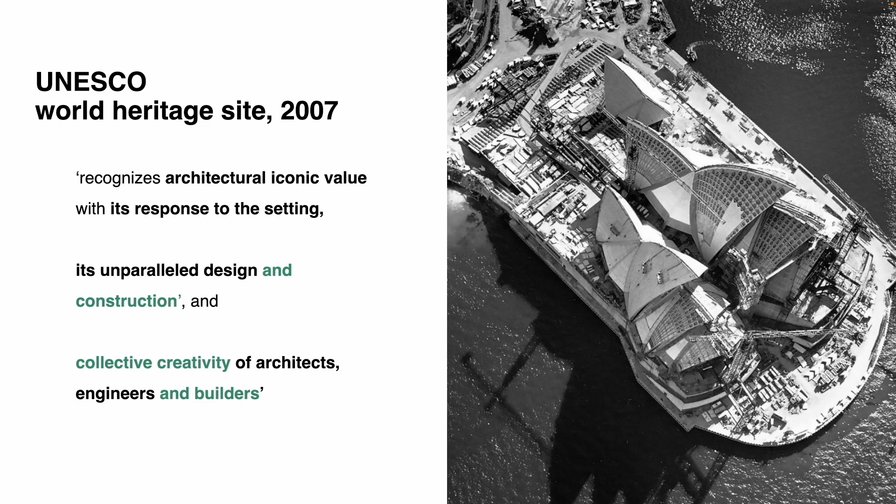In fact, the role of the contractor was also central to the Sydney Opera House inscription as a UNESCO World Heritage Site. And in fact, the listing goes even beyond acknowledging the building's architectural iconography and includes its unparalleled construction and collective creativity of architects, engineers, and last but not least also the builders.

However, for the past 50 years, attention has been mostly centered on 2 key figures, of course, Jørn Utzon, the architect, and Arup, the firm, or Ove Arup, the founder of the firm. The story of the building has also often been framed, as we all know, through the conflict between Utzon and the Australian government, and Utzon's final departure from the project. And also eventually, his replacement with Peter Hall and so on. And this is the story.

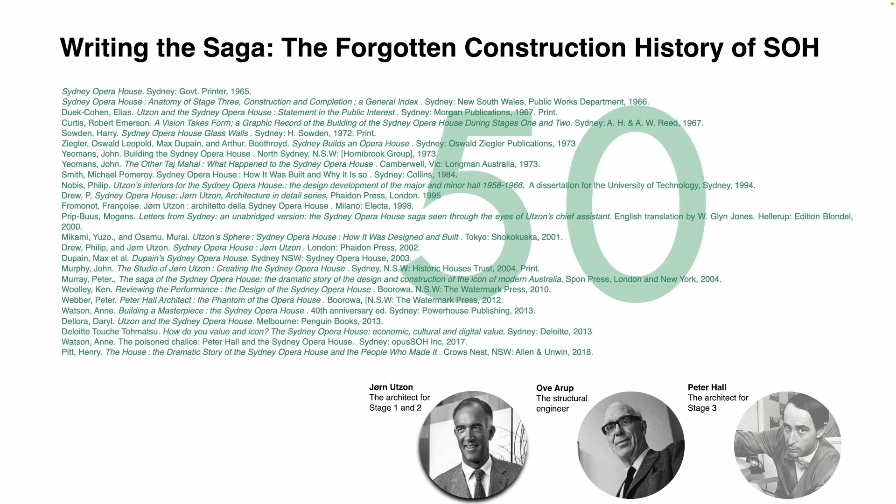These are all the books and papers published on the Sydney Opera House in 50 years. But there was very little recording the construction history of the Sydney Opera House. So now, coming to the project itself, what we all know very well is that it took 5 years of intense hard work for the engineers at Arup in London to find a structural solution capable of realizing Utzon's beautiful but unbuildable vision for the Sydney Opera House.

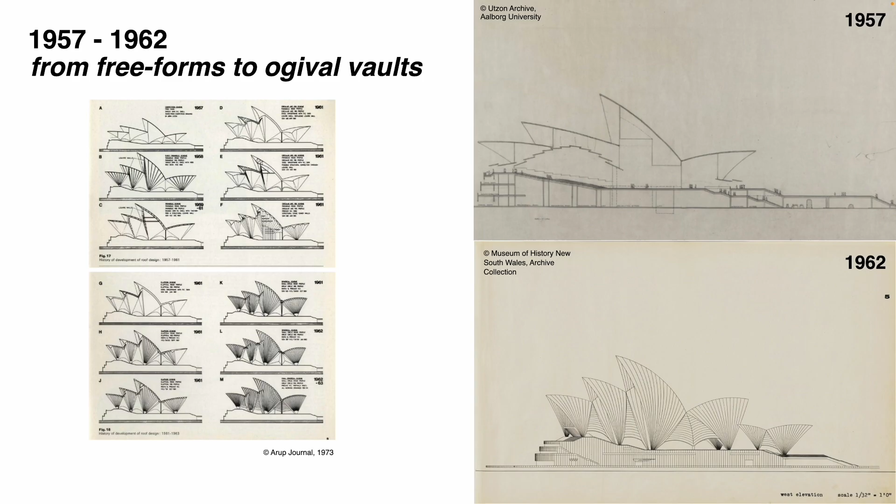During this process, they had tested at least 12 different options, trying different geometries, ellipsoid, parabola, circles, all combined with different tectonics and structural systems and materials, concrete, steel, then back to concrete, and so on. Eventually, in 1962, a spherical geometry provided a workable geometrical solution through which the sails, the roof structure, could be calculated at that point with some confidence.

The geometrical solution drastically transformed the outline of the roof and changed its structural definition. The organic thin freeform shells were transformed into a series of classic symmetrical ogival vaults made of solid rib cages, each standing very elegantly on a single vertex, as you can see from this image. What led to the acceptance of this radical, controversial, especially at the beginning, solution was that it provided a clear construction strategy which had been lacking to that point.

In fact, the spherical triangular sectors that form the vaulted roofs could now, as you can see from the image there, be divided into a series of repetitive ribs, which in turn could be segmented into a series of parts. From there on, the so-called spherical solution paved the way for an ideal mass production process to precast repetitive segments which could be assembled on site like a giant three-dimensional puzzle.

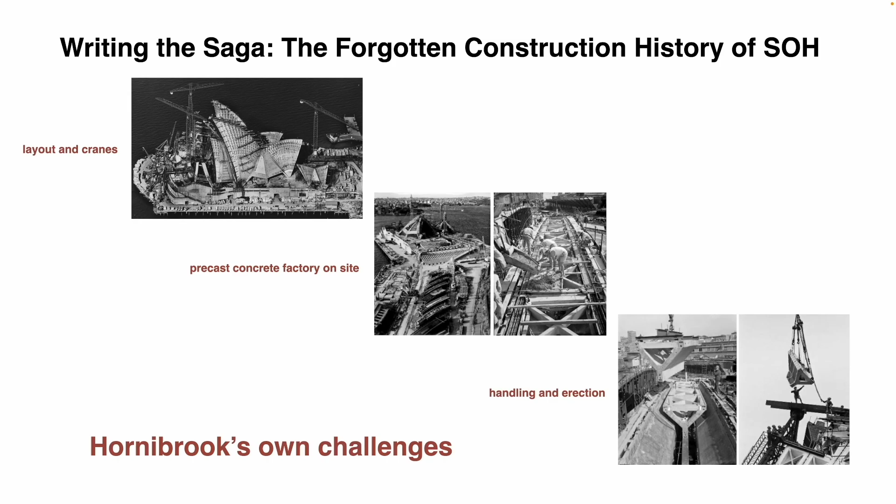And of course, by looking at the photo, you can start imagining how they organized the layout, the site, the precast concrete factory on site, and also how they had to handle and move all those giant pieces forming the roof.

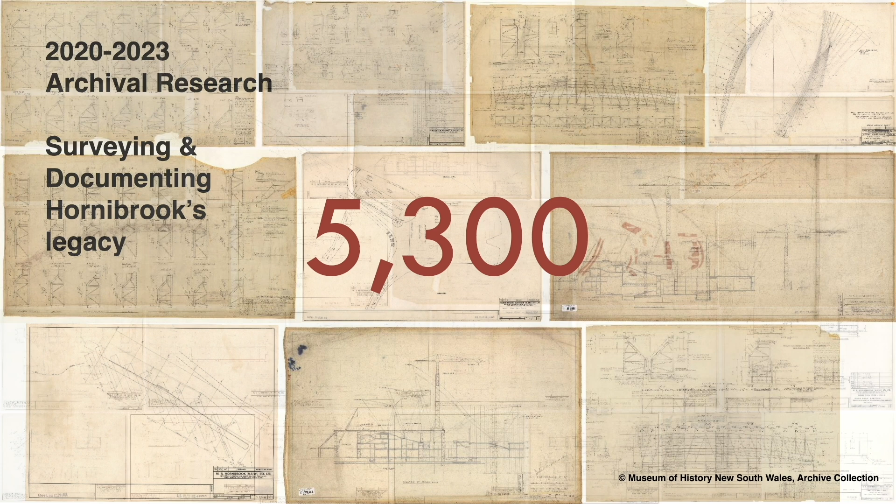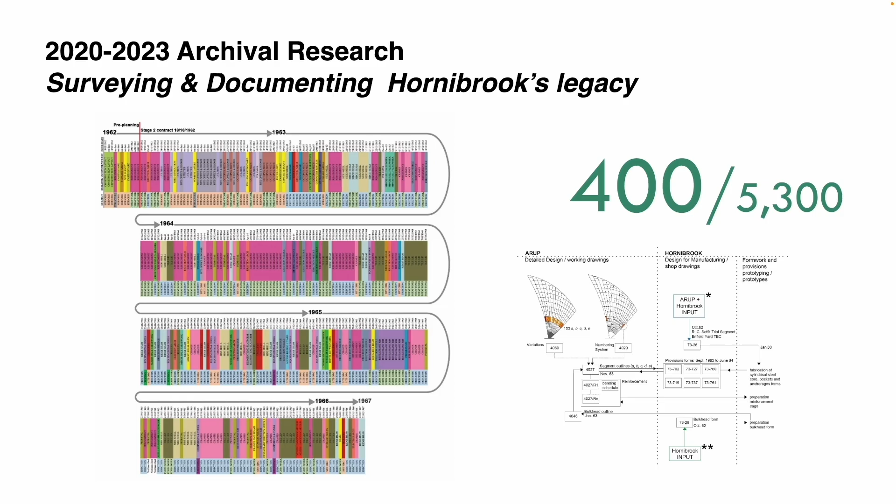And here you can see how we started by organizing this documentation. And also in this image there on the right, you can see a workflow that shows you how the drawings done by Hornibrook and tested through the prototypes they were doing in the factory were actually informing all the drawings done in London by Arup. So there was this very, very intimate integration between the engineer and the contractor. And this was all done by reconstructing the date, the issuing, and the variation of all these drawings.

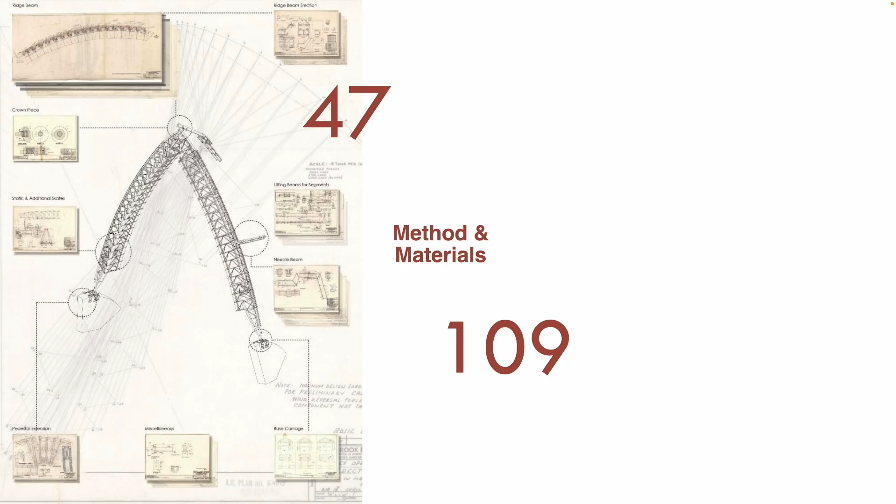We were also able to find and to document for the very first time, through 47 drawings, the legendary telescopic arch. We are missing a picture there, but that's fine. And on the side, the image is missing, but 109 drawings documenting the casting yard of the Sydney Opera House.

Now, we often forget that the Opera House was not just a complex project, but also a complex project built on a complex, unique site, surrounded by water on three sides. Utzon also placed the two halls next to each other on a podium and toward, of course, the water, the bay. His design, the only one to do so in all the entries for the competition of the Sydney Opera House, liberated the southern area of the site while condensing all the building volumes towards the water. This decision, while favoring the building's monumentalization and its iconic presence on the harbour, also saturated all the available width of the site with a podium.

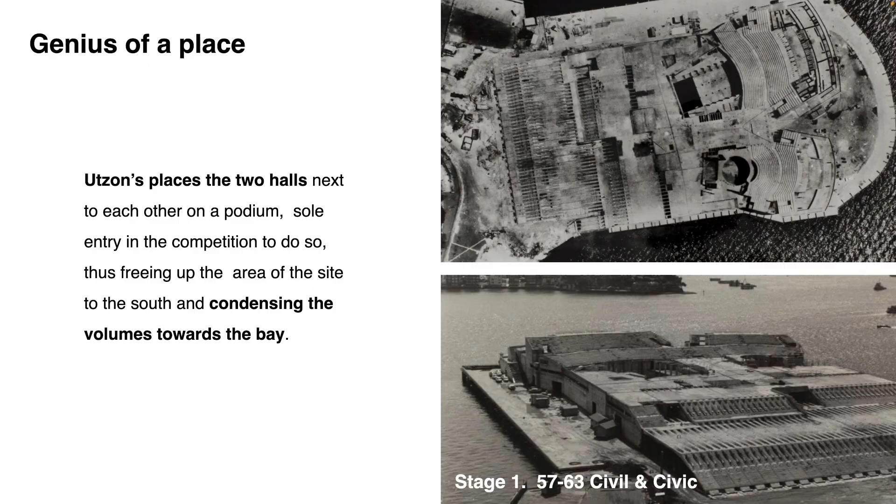This limited, of course, the space for material storage and circulation across most of the site, making on-site logistics a crucial aspect of the construction challenge. Hornibrook, even before signing the contract, began issuing specific drawings to address this very pressing issue, to organize the construction site across the podium. This was one of the very first times we were using in Australia what we call today early contractor involvement, if you like. On the left here, you can see one of the very first sketches made by Hornibrook to rationalize Bennelong Point with the casting yard, the storage areas, the production for the tiles, and so on.

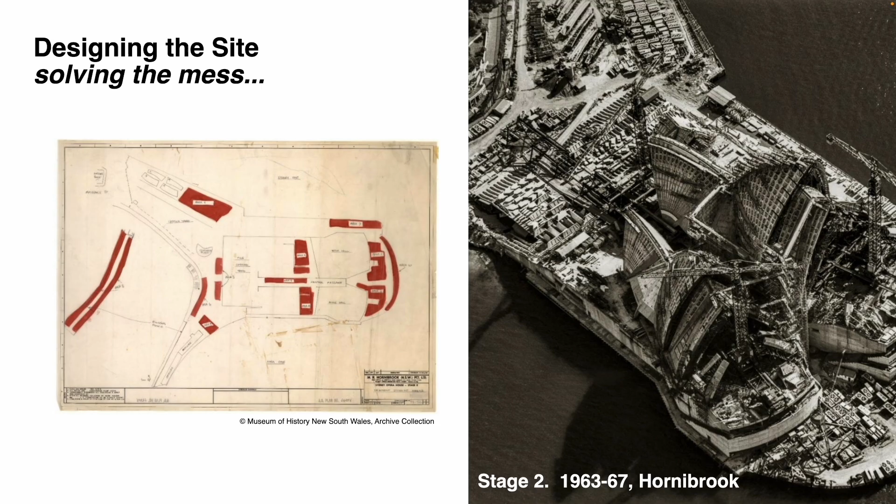Very simple sketch here. But the very first set of drawings issued by Hornibrook were this initial section here, which showcased the contractor's immediate attempt to improve the north to south site connection with these elevated trusses built on a railing system to house 3 Babcock Weitz French cranes. These were the largest cranes available at the time, produced in Lyon, in France, and shipped to Australia. Now, often recorded in history, this is not new data that we have, these cranes had a maximum hoisting capacity of 10 tons. This very datum determined the maximum weight and consequently the dimensions and eventually the final look of the parts making the assembly of the Sydney Opera House roof.

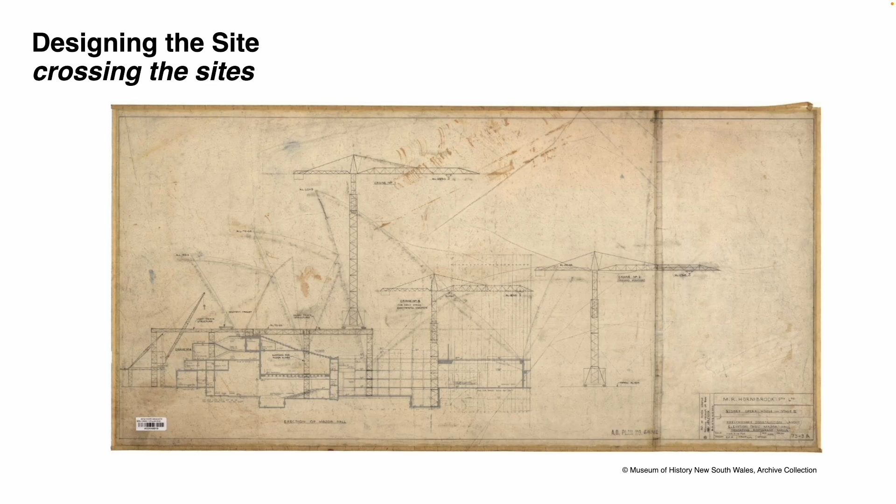This is just showing you the intimate, very profound connection that you have between the final look of the Opera House and these construction requirements. So once erected, this giant multidirectional steel machine with its moving cranes became one of the most spectacular material expressions of the construction process. Yet, it should also prompt us to reflect on the construction of the Sydney Opera House as an exceptional context, spectacular indeed, but also extreme in terms of site condition, construction methods and means, logistics, and site organization.

To understand this a bit better, we have highlighted three main challenges, each connected to a specific part of the Sydney Opera House and a specific frame of the construction, and we have defined them through three loci: sails, octopuses, and telescopic arch. We hope that a very brief description of these parts will enhance our understanding and appreciation of the building.

And I always say it's like my wife, it's very easy to love, but sometimes very difficult to understand. So,

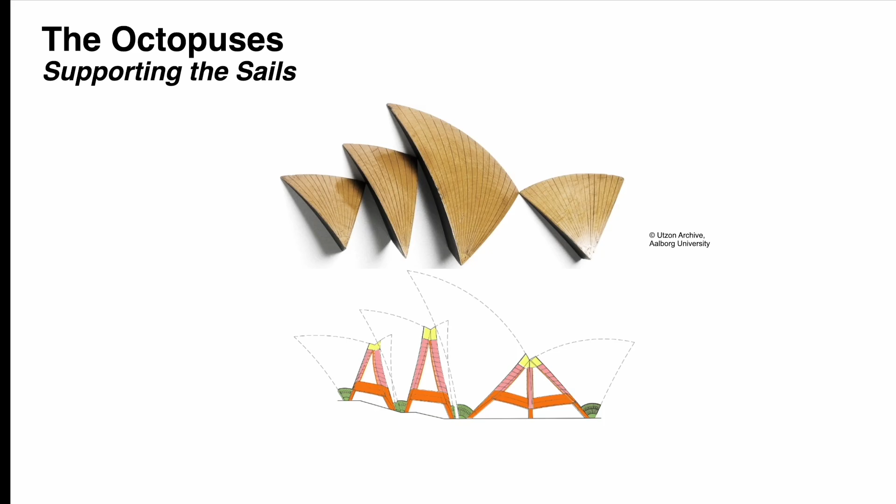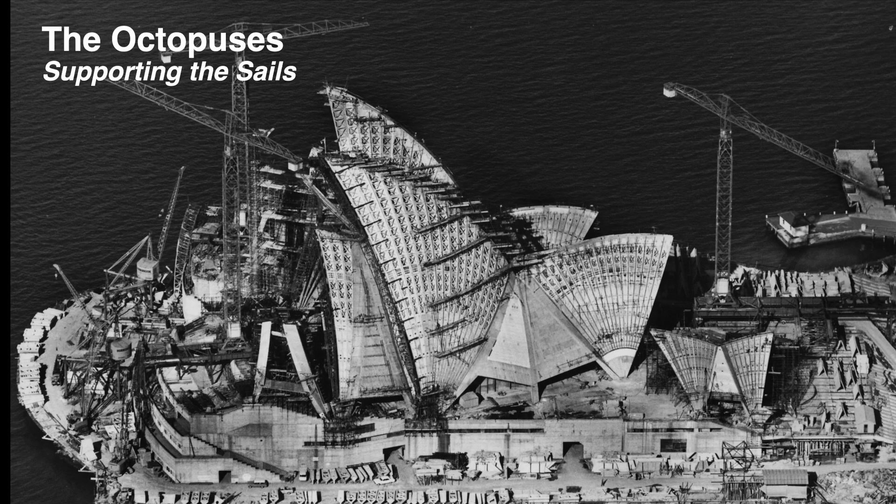Okay, so to analyze the roof we have to start from the octopuses. They are also known as side shells. And these are essentially a series of tripods placed between the main spherical sails, which act as a supporting structure for the main sails. In particular, the octopus, and this is the octopus you can see here in this one, for example, that is under construction. There is one that is already completed in between the main sails, and so on.

In particular, the octopus legs presented a twofold challenge. They needed to form a self-standing structure capable of supporting the main shells in equilibrium, while also offering a smooth transition between the profile of the side shells and the main shells. And that's why they had this sweeping, curving section.

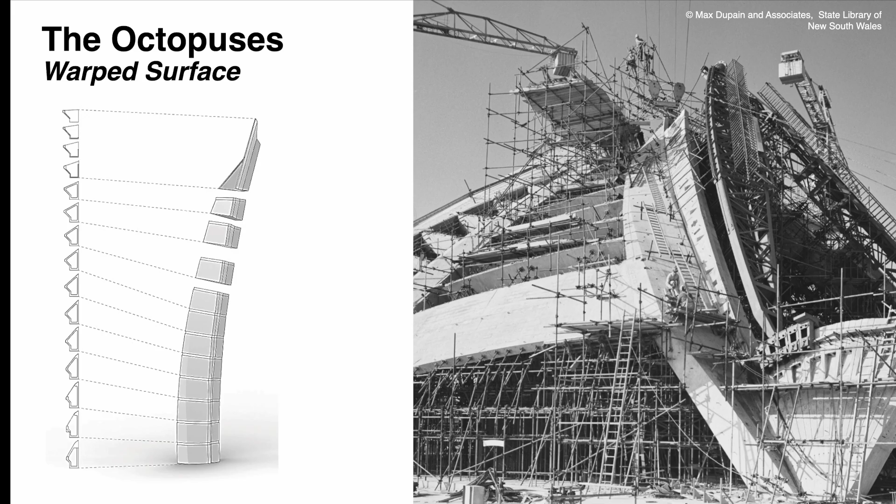Now, this beautiful photo that you see here is, of course, a photo they staged, taken by Max Dupain. You can see they weren't even working that day because it was raining and so on. So it's a beautiful photo, but of course it's staged.

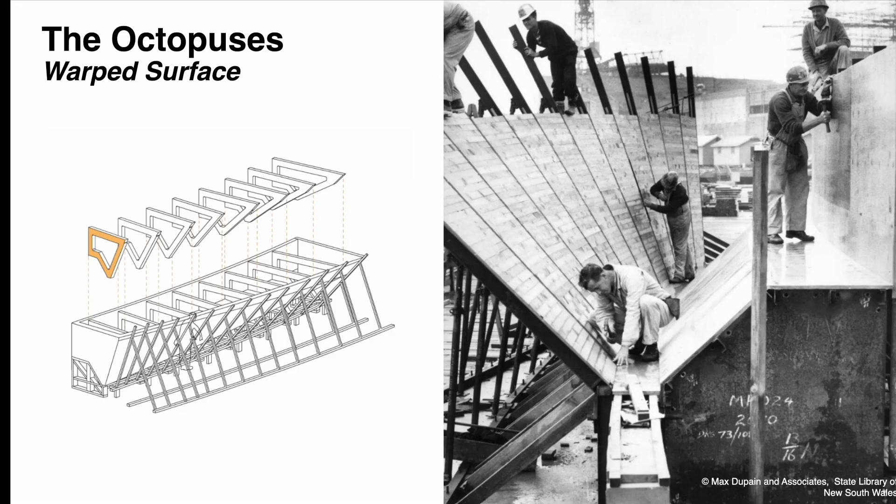But you can start appreciating the artisanal kind of degree that you had for the production of the octopus parts or precast segments. And here you can see all the octopus parts are made as a hybrid construction between cast in situ parts and precast elements, and then at the end there is also another cast in situ part.

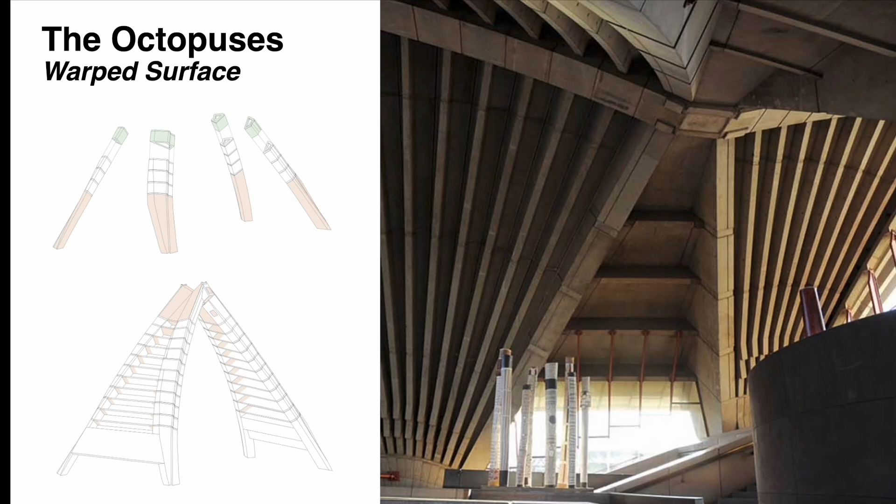Luciano will explain all the casting process a bit better. But for now we want to focus on another challenge regarding the assembly of the whole octopus. Much like building a house of cards, constructing the octopus requires all the parts to be positioned in their final location before they could be secured with post-tensioning cables, additional casting, and final bolting.

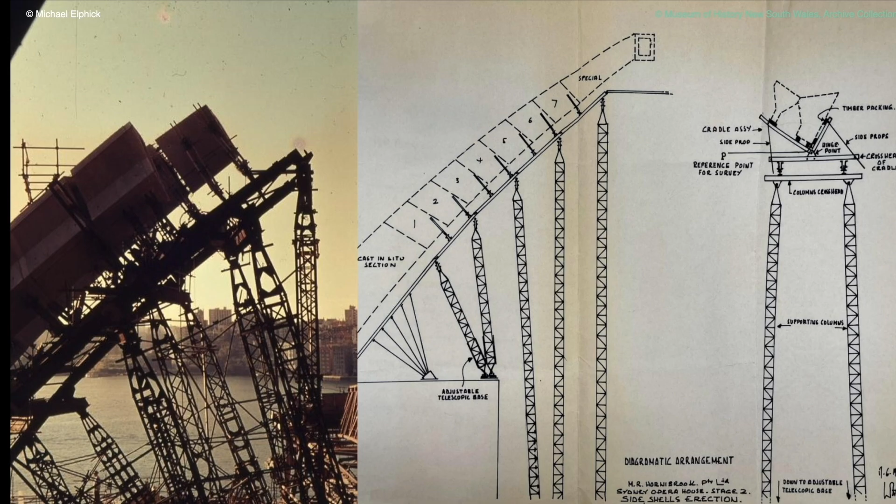The challenge was to design a temporary structure with a great degree of flexibility, a challenge made even more difficult by the fact that the podium was still open. As a result, Hornibrook designed a telescopic scaffolding system. You can see this in the image. The telescopic columns allow reaching the bottom of the stage pits, while flexibility was introduced by adding hinges at the top and at the bottom of the columns, and also incorporating soft springs at the top. Overall, looking at the image, you can also picture this as an octopus standing on a wobbling jellyfish.

The actual point of contact between the temporary structure, the props, and the actual structure, so the leg of the octopus, was achieved through an ingenious system of steel cradles. This system was devised in a way that could be adjusted to follow the curving section of the octopus legs. And in these very beautiful shop drawings, we can see how the cradles worked, housing both the segments of the octopus in pink and the very first rib of the main sails.

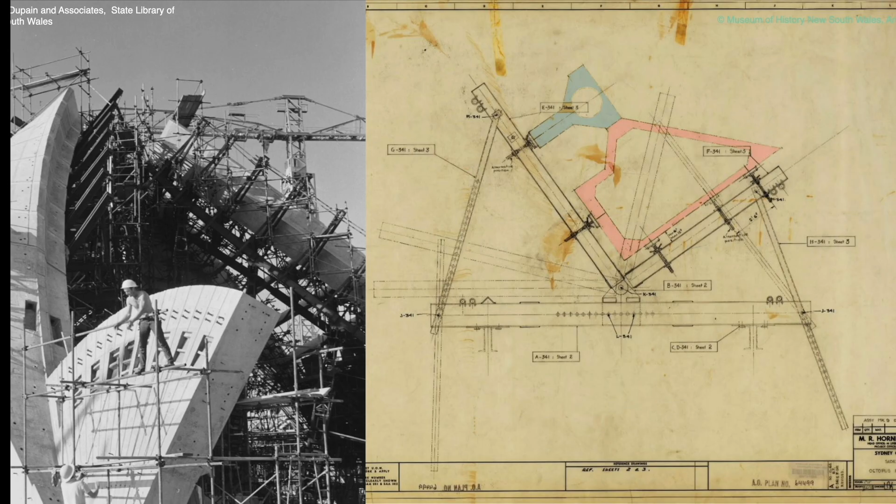Now, we also have to consider that each part was large and heavy, thus their precise positioning in space had to be determined from the very, very beginning. And here is a beautiful hand-drawn illustration showing this very procedure step by step.

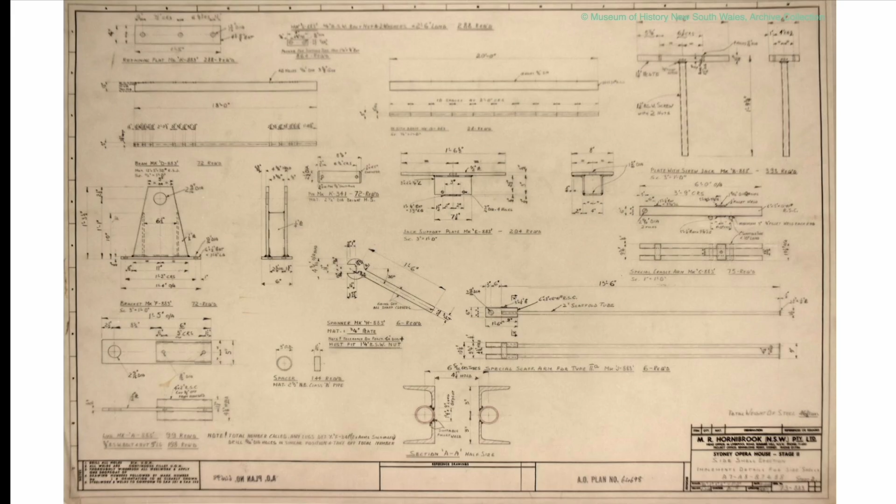Now, once everything was in place and ready to be fixed and secured, what was needed was, of course, a spanner to fasten all the nuts and bolts together. But a commercial spanner wasn't perfect, or wasn't ad hoc for this, so they had to design a big spanner to secure all these parts together, just to give you the degree of design Hornibrook had to do.

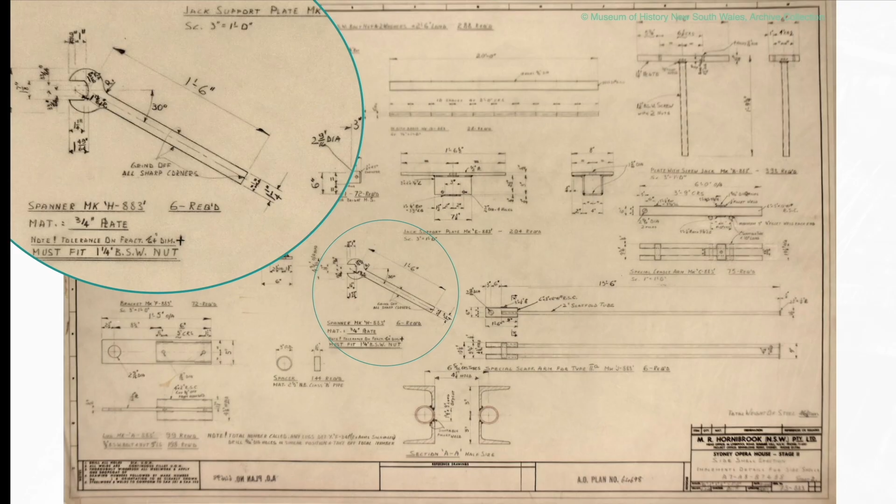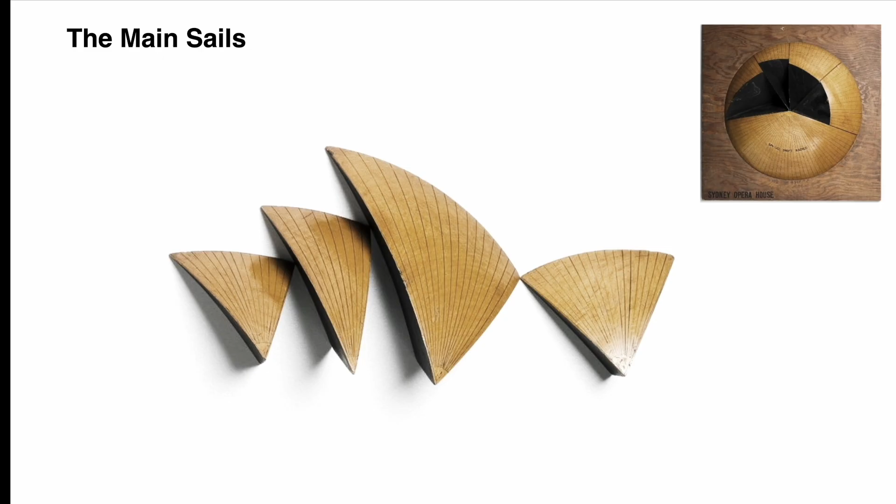Now, once we start piecing all these preliminary observations together, we can begin to appreciate that the construction of the Sydney Opera House was in fact, as expected, a highly complex process, one that constantly required adaptation, adjustments, and problem solving on site. We are already starting to debunk the myth of the spherical solution. In fact, the reality goes well beyond the familiar story that presents the construction of the Sydney Opera House as a simple three-dimensional puzzle. What we have seen so far is a building site far from the repetitive manufacturing logic suggested by the spherical solution.

Now, we can dive into the construction of the main sails to see how this eureka moment actually translated into reality. First of all, we need to address the challenges of the production of the sail segments. The first point to stress is their number: 2,400 concrete elements needed to be produced. The second substantial challenge was that every single rib of the main sails was made by an assembly of elements showing different cross sections. From a solid T at the pedestal level, each rib section opens up to a Y-shaped section at the top.

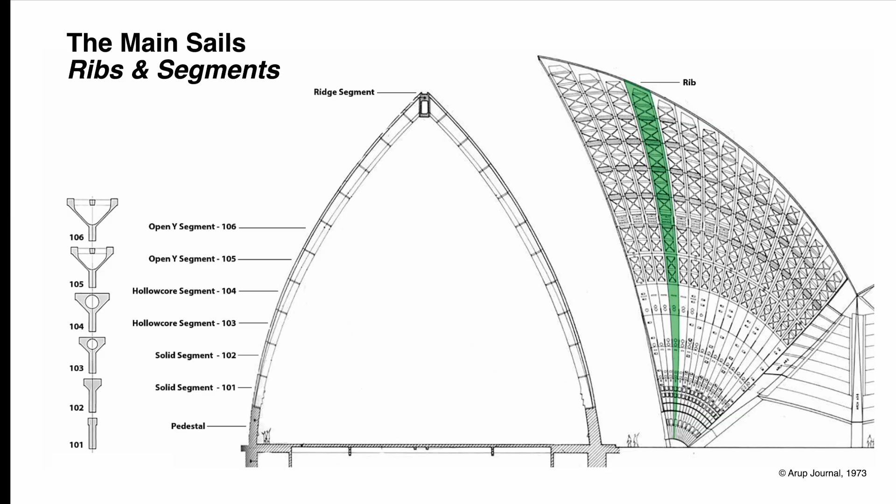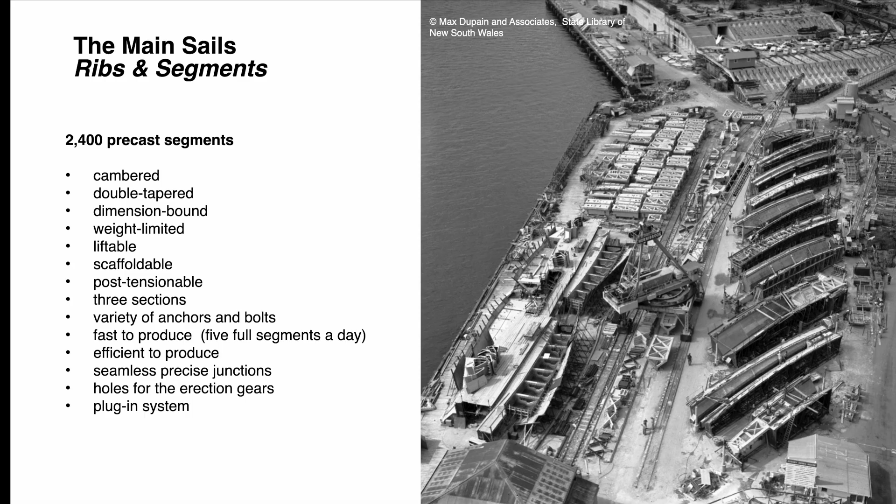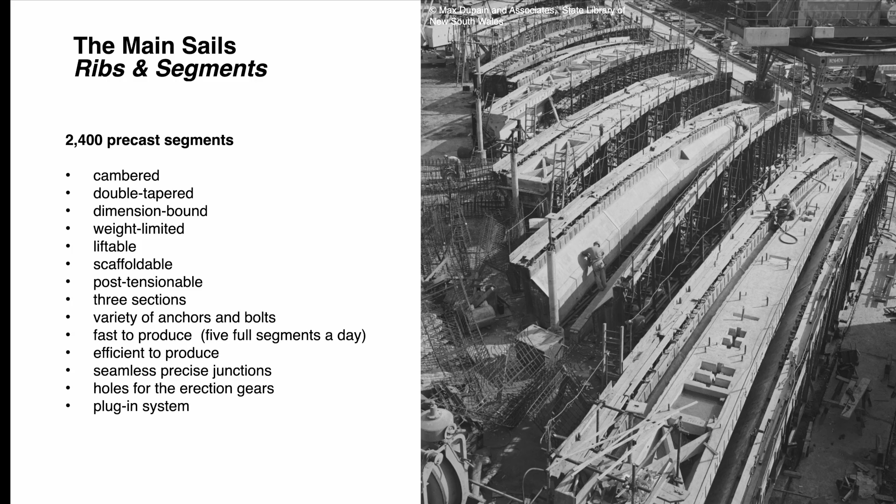Stressing these two major aspects, the number of pieces and their geometrical variations, it is easy to imagine that the open-air factory invented by Hornibrook on-site to manufacture all the precast segments was, in fact, an advanced and pioneering production line. The Australian know-how is embodied in the design of these 10 molds used to produce the rib segments. The complexity of the production workflow can be grasped even further by looking at all the sub-requirements for the production of these segments: to be fast to produce, three-section, post-tensionable, scaffoldable, liftable.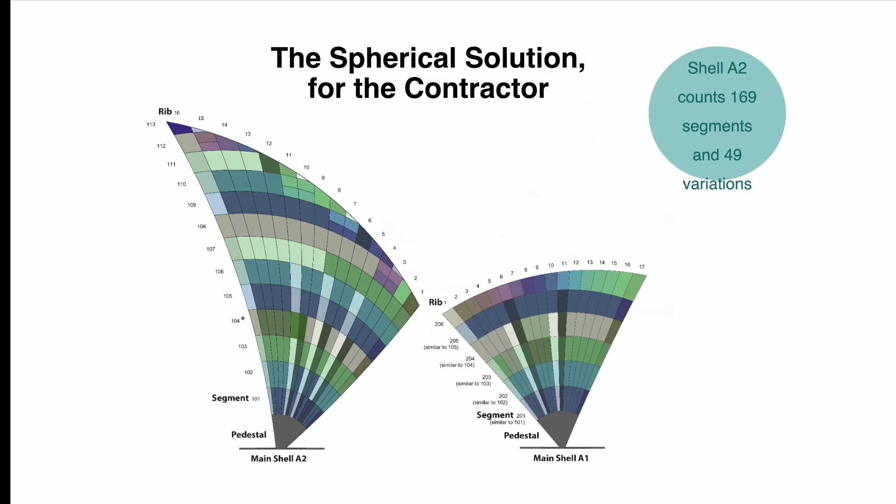Therefore, when we start counting and assessing all the different components and requirements contributing to the construction of each sail segment, we can actually see how the spherical solution played out in the eyes of the contractor. The colors here are in fact highlighting all the variations that the segments belonging in the same latitude, on paper identical, had in reality. The Australian molds were developed through this very drawing, which is the tangible testimony of the local knowledge. Specifically, it shows the mold used to produce the first 5 segments of each rib.

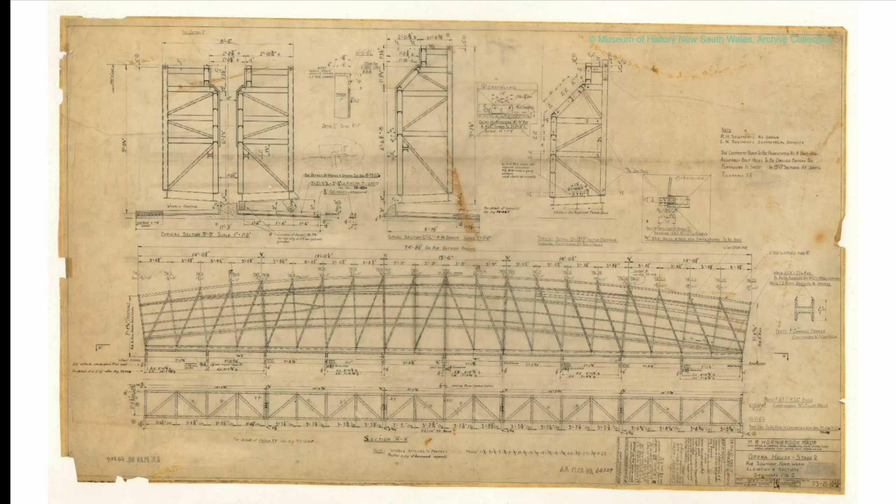And most importantly, it was issued by Hornibrook before signing the contract. This is because at the time, Arup needed to check with the contractor the feasibility of the spherical solution from a construction perspective. The same can be said for this other drawing, which is instead designed to produce segments 6 to 9. Through the reading of this record, it's easy to assess that the degree of detail and complexity of this formwork exceeds what was common practice in the 1960s.

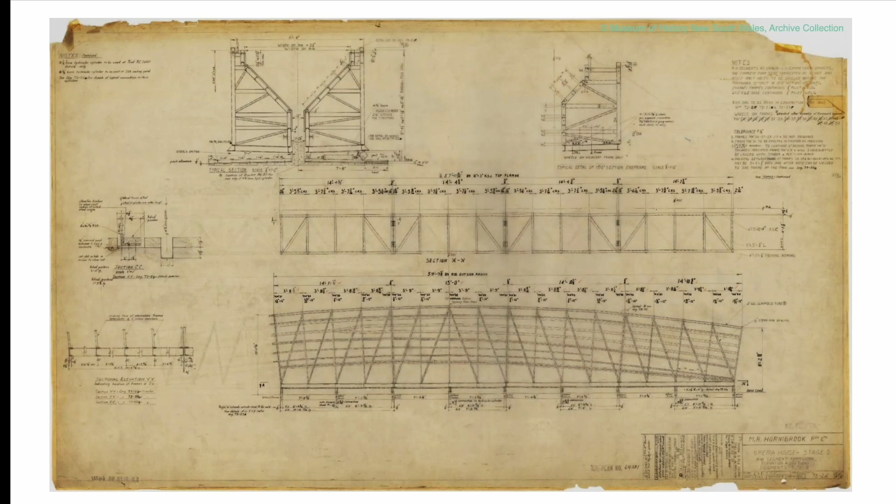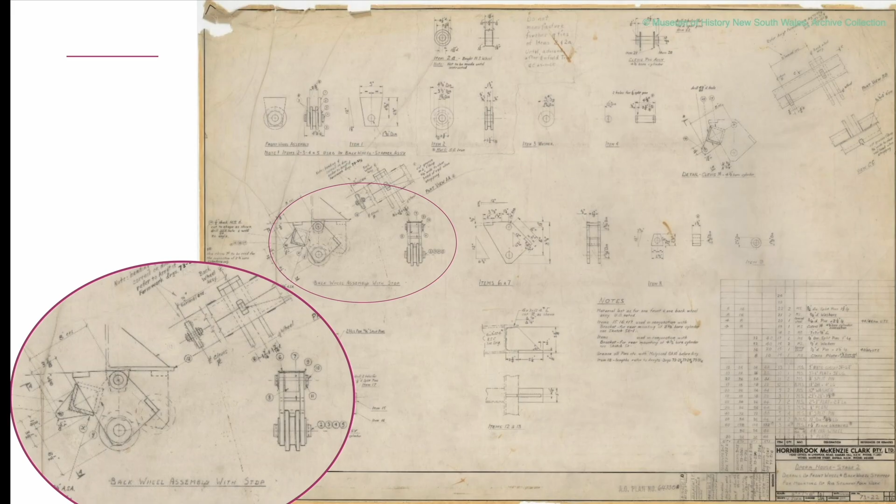More specifically, the customization even extends to the invention of the wheel used to open up the molds. This wheel was engineered and produced by Hornibrook to allow a slow and careful stripping of the bed to guarantee the smooth finishing requested for the concrete. So there's 2 hinge points where basically the molds were not just simply opening, but there is slight tilting in their parts and then opened for the delivery of the concrete pieces.

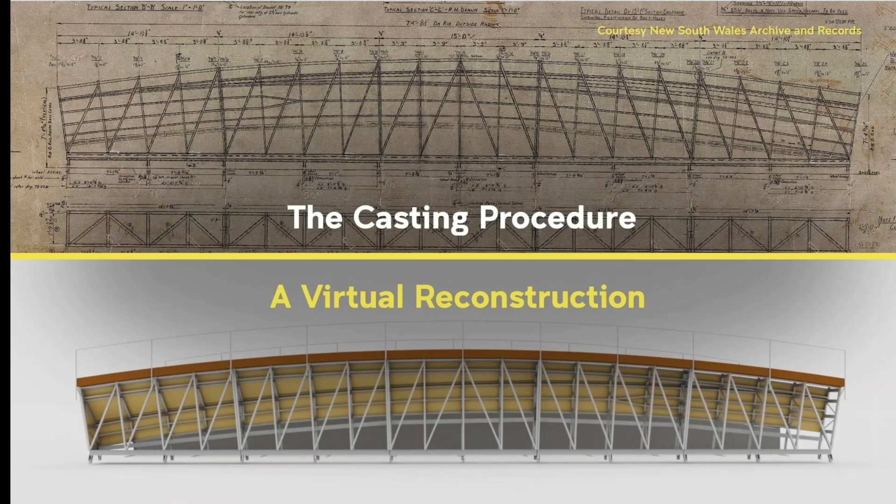But to define even further the degree of complexity of the casting yard, let's take a look at how the first 5 segments were produced. The beds consisted of 2 steel trusses topped with plywood and a layer of polyester resin, reinforced by fiberglass. They could open and close hydraulically. And as I said, the system was designed to ensure careful automatic stripping, a process that took around 15 minutes.

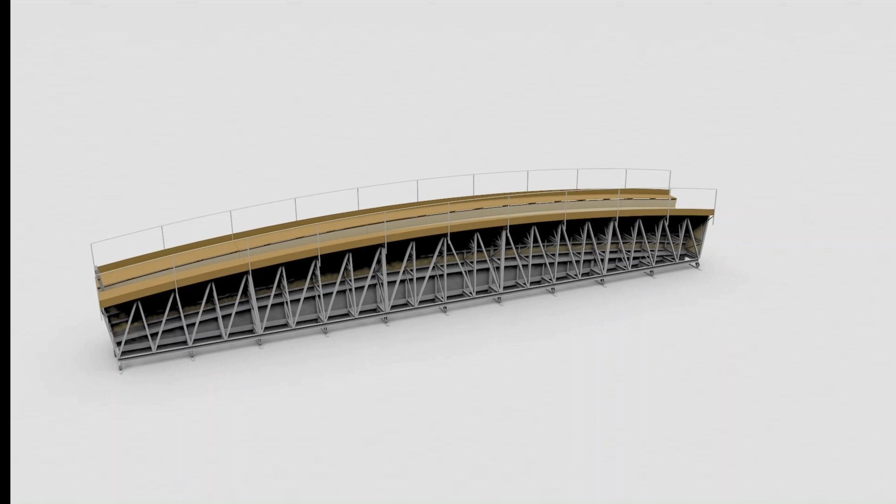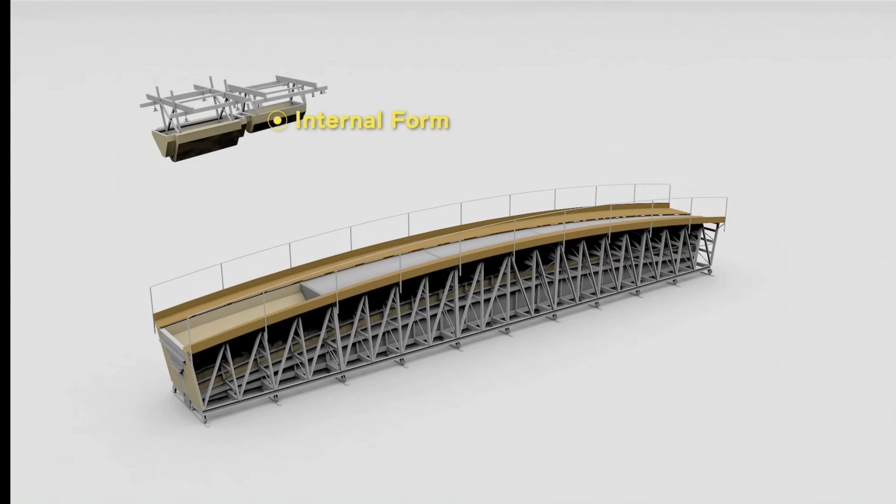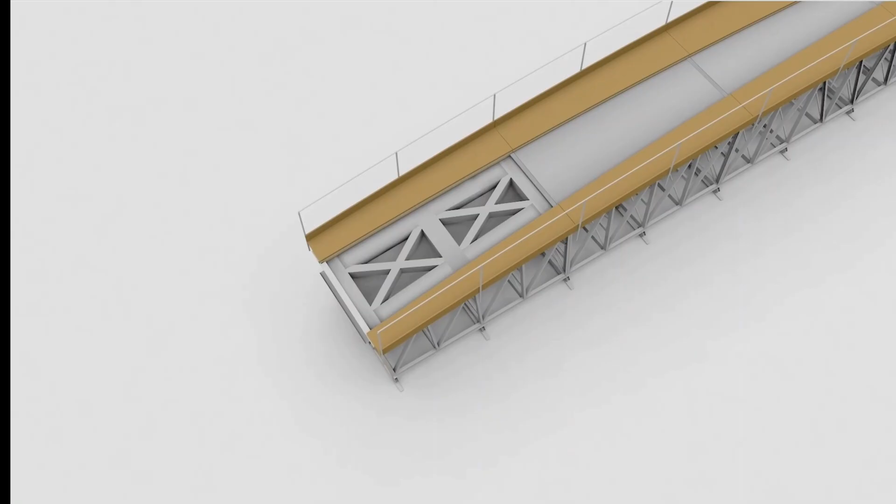In the initial pouring stage, precast bulkheads were used. These bulkheads provided workers with a tangible reference for laying and aligning the ducts later used for stressing cable through each rib. The first 4 segments were cast together, while for the 5th one, an internal form was required to achieve the Y sections. After placing the element into the bed, the first pouring occurred. Subsequently, the precast cross bracing was placed on top and connected through the final pouring.

The same approach was used for all the other segments that had a Y section, so from 7 to 12. Here, the adjustable inner form was designed made of 3 parts, 1 at the bottom and 2 telescopic wings. This starts to show the logic of Hornibrook to make every single part efficient and every single part adaptable.

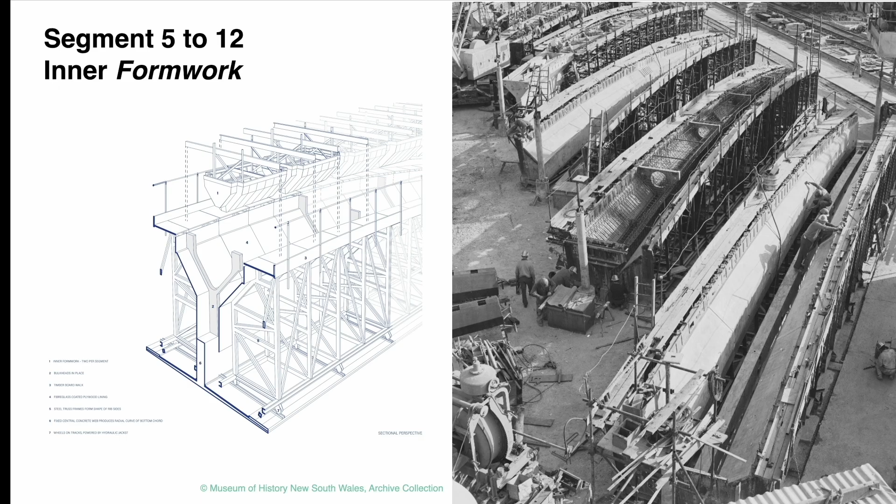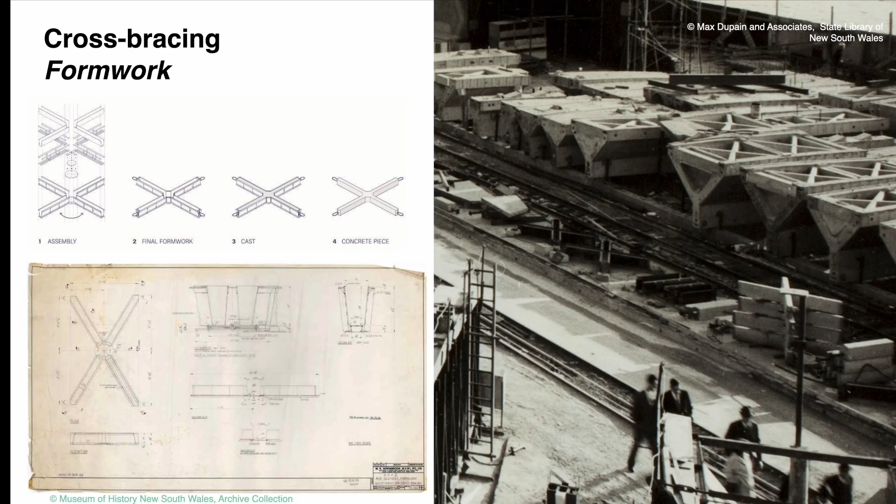But beyond the fabrication phase, how were these segments assembled? This image of the construction site shows bustling activities driven by tight schedules and very close working conditions. 2 major tasks were being executed simultaneously: the construction of the side shells, narrated by Paolo, and Octopus with the impenetrable scaffolding, and the assembly of 8 precast sails.

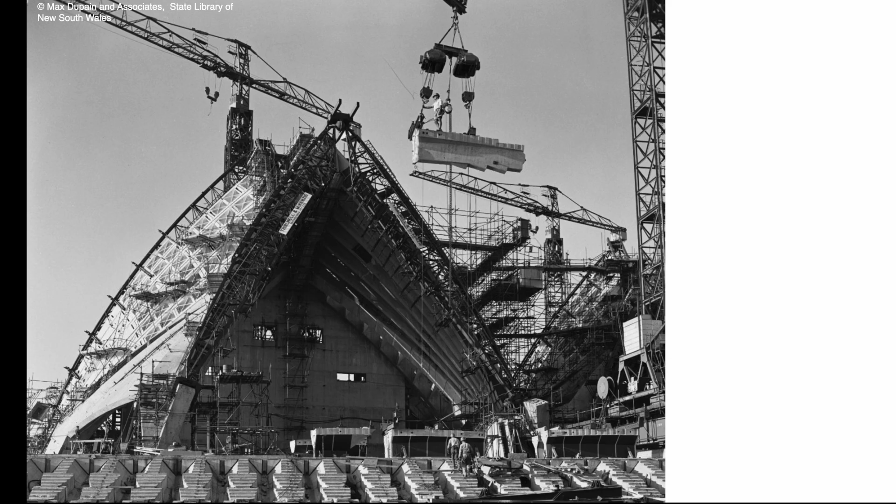The engineering marvel at the center of the assembling process is, without a doubt, the erection telescopic arch, devised by the Hornibrook duo of engineers, Australian Corbet Gore and French Joseph Bertony. This aerial and movable crane was created to provide temporary support to the sail segments, 1 concrete piece at a time, rib after rib. The aerial nature of this centering, the erection arch, was necessary to avoid heavy and complicated scaffolding that would have interfered with the crane's railings and ground operations. This was not common practice.

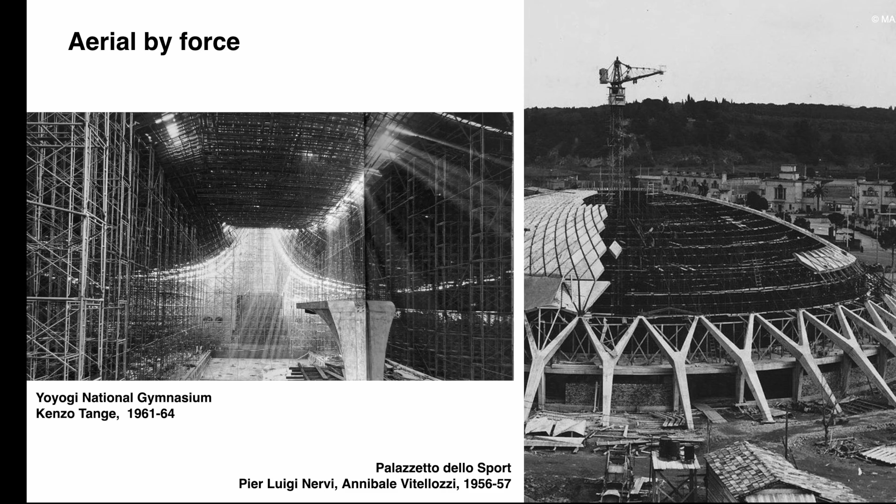At the time of the construction, other challenging structures were built around the world, embracing the same formal complexity, but as we can see from the use of traditional scaffolding, not the same construction advancement of the Sydney Opera House. Thanks to the archival material we found, we are now fully able to understand all the sequencing. The design of the erection arch aimed to gradually follow the spherical geometry of the main sails. For each rib, the arch maintained an open sliver of space necessary to the progressive insertion of the precast components, stacked 1 on top of each other.

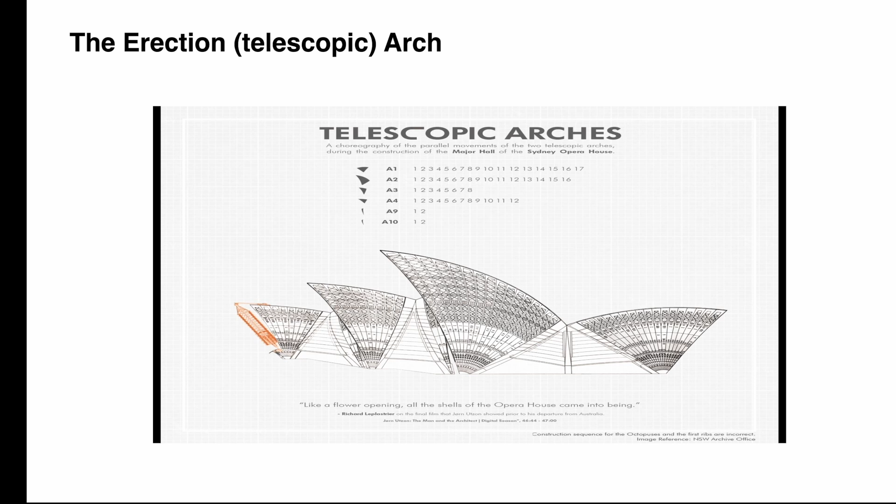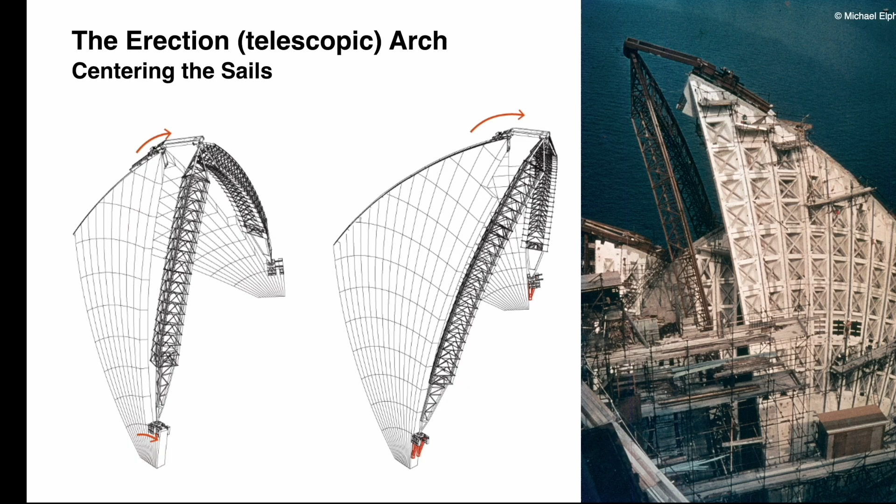Once a rib was completed, the arch was relocated to the next position, reopening the gap essential for the insertion of the components of the next rib. This process was repeated for all the ribs. This distinctive movement of the erection arch was made possible by a series of meticulously designed components and connections, showcasing the utmost engineering ingenuity. First and foremost, the 2 poles were conceived in telescopic section. This design allowed each side of the arch to be extended to accommodate the longest ribs.

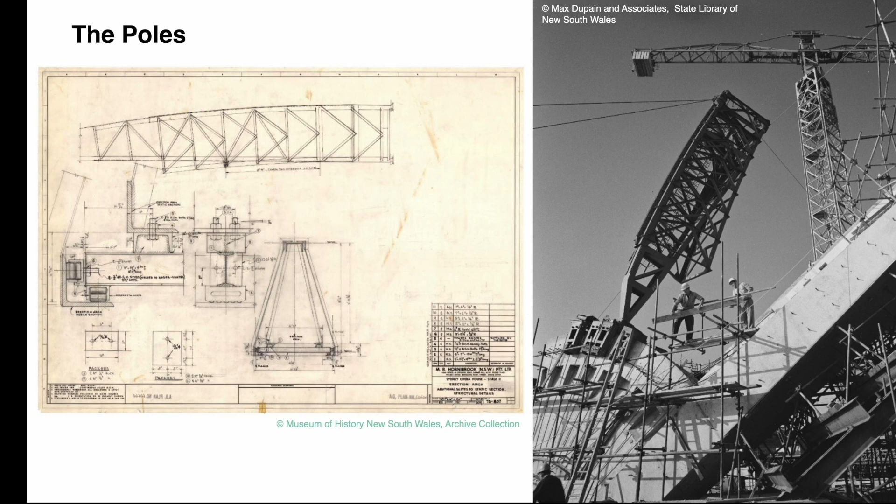This is when it's helpful being Italian, but it's not just a translation in one direction; the erection arch moves, extends, and rotates. So all these three different movements were allowed by very sophisticated joints. This is our favorite, the crown of the erection arch, which is a chrome ball joint that, as you can see from the top left corner, allows that kind of independent movement that follows the spherical solution.

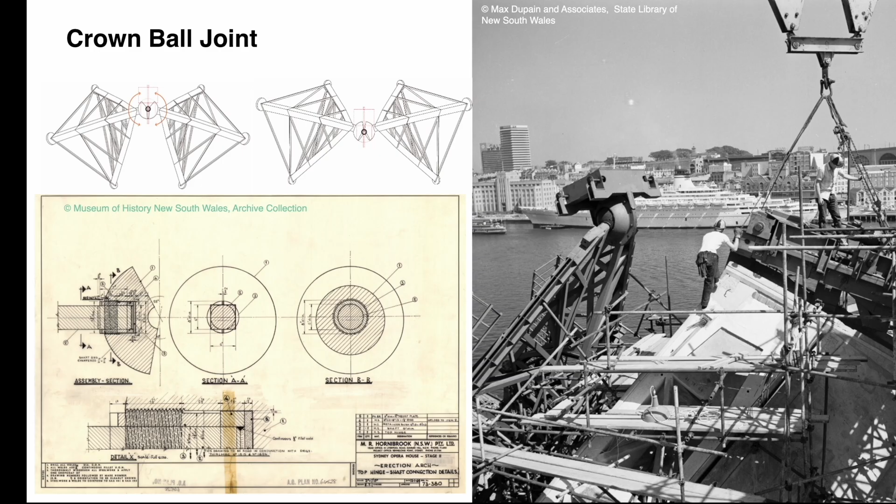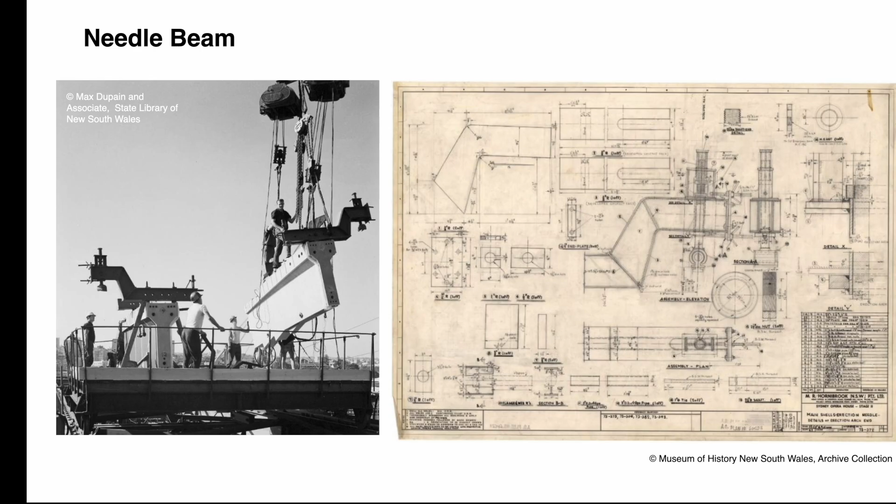And then the tiny little detail, which is this one, that connects the steel needle beam with the top of the erection arch. Imagine fixing and connecting those two steel parts at 50+ meters high.

The final piece of the erection gear, as I said, were all the needle beams that you can see in this beautiful picture. The needle beams secure the concrete segments to the adjacent completed rib and keep the arch in the correct position during the whole assembly process. After the rib was connected with the post-tensioning, all the needle beams could be removed and the arch moved to the next position. So the needle beam also worked as a way of managing and achieving the tolerance of rotation of each rib, sustained on one side by the erection arch and on the other side by the rib that had already been assembled.

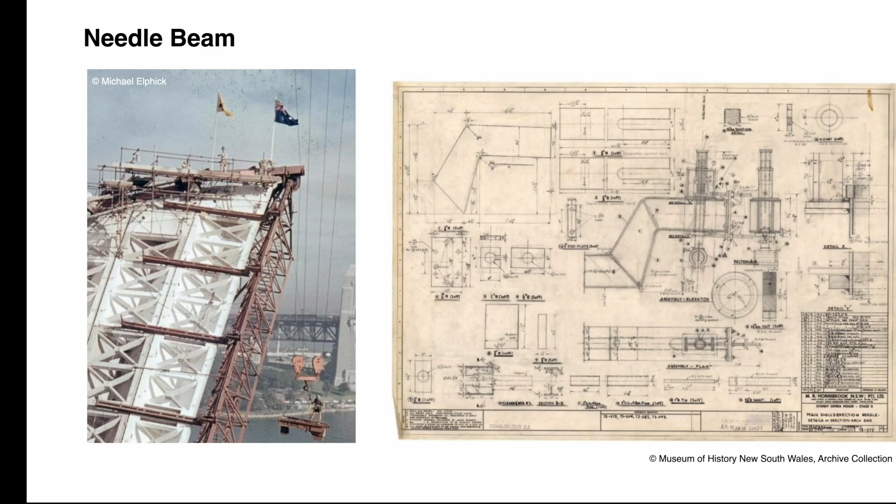So why do we care about this, or what does this research reveal? First of all, this research reveals the extent to which the general contractor contributed to the project, not as a builder, but as a designer of processes. Each invention, from molds to erection system, forms part of an integrated approach where construction becomes a form of design. The solutions developed by Hornibrook were not technical fixes. They were design acts, coordinated, optimized, and deeply embedded into the project's logic. Construction here is not execution, but authorship.

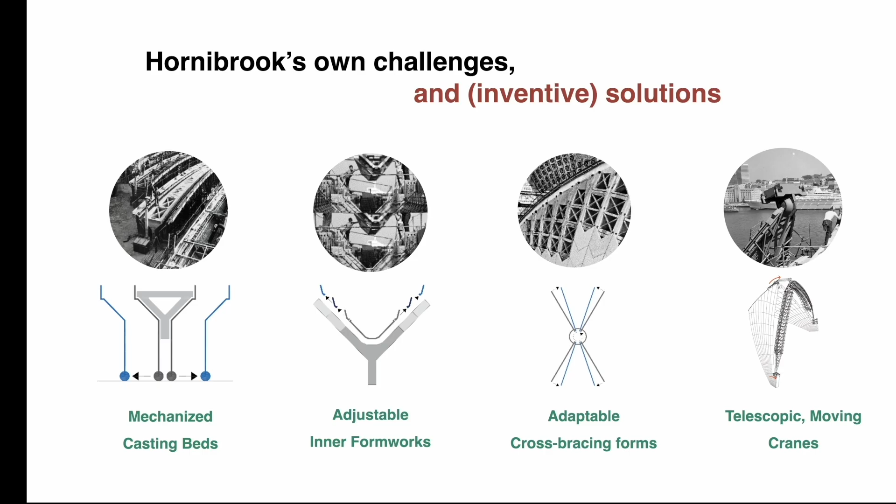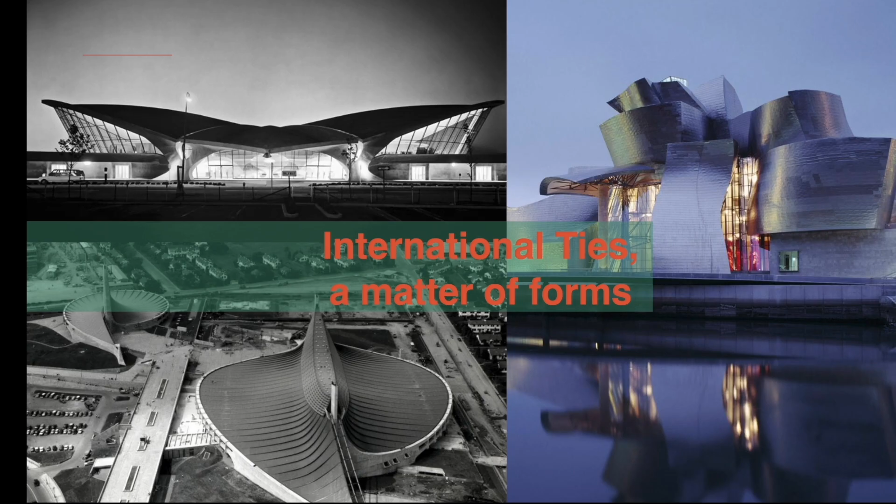The second main aspect that this research revealed is that we should read the building in a different way. Often the significance of the Sydney Opera House is identified in its international role played in the history of architecture, as a seed of a design trend that led to the creation of complex and sculptural buildings around the world.

By contrast, through the lens of this work, we were able to identify the national ties that the Sydney Opera House has with the local knowledge that was so pivotal in its completion. Knowledge that was developed by Hornibrook, not so much with buildings, but through the construction of some of the most iconic bridges around the country. For this reason, the Sydney Opera House can be seen today not only as a product of foreign creativity or foreign engineering, but also as a peak of technological innovation in construction that was already here. Thank you.

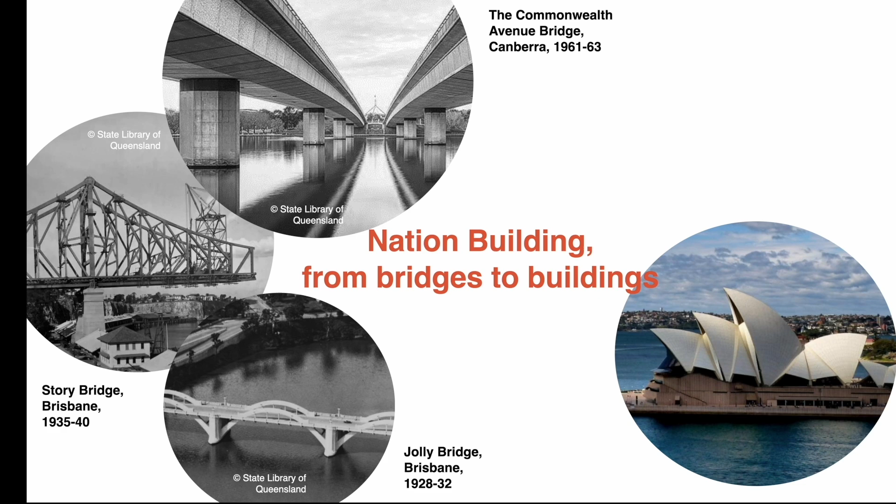Thank you. It's very fitting we should have that discussion in this space, where we've so much focused on understanding this building as an incredible partnership between a developer, an architect, and a structural engineer. And when I say developer, of course, builder-developer. And your research reveals that on a completely different level, and I think it's an inspiring way to think about the building, beautifully illustrated by all the material you've shared with us. Anyone who loves a drawing and a construction photo would completely fall in love with that work.

And as beautiful as the Opera House is finished, it seems more beautiful in revealing the extraordinary depth of its structure. It sort of lives as an object rather than a form that defines space. It has life, I think, in those drawings and photographs.